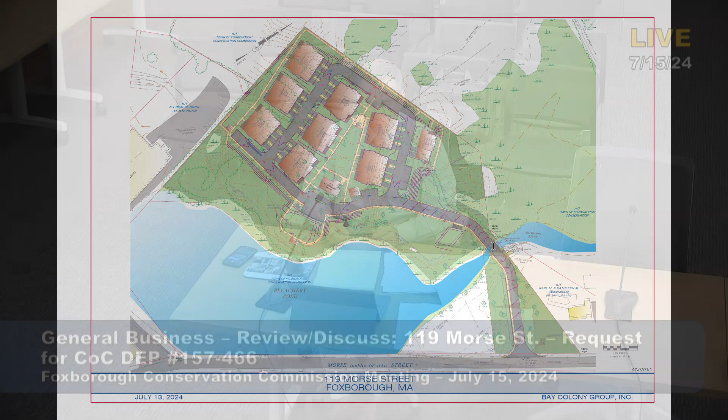As I stated, we went through the comprehensive permit process, and they call it a comprehensive permit because one board handles everything, the ZBA, but everybody gets input. So we took input from the Conservation Commission, the Planning Board, the Selectmen, the police, the fire department, and the DPW. Every board had input, and the ZBA listened closely and made sure we addressed the issues that were brought up.

What we're going to do is follow that existing path, but we have to widen that driveway. It's probably maybe 15 feet at its widest point. We have to widen it now because prior to our previous design, we didn't have to since it was commercial. But now that it's residential, the fire department wanted a minimum of 20 feet wide, and the Planning Board and ZBA wanted a sidewalk going out to Morse Street, because the school buses will not pull into private developments, so they wanted a sidewalk to walk out to Morse.

I'm going to talk about that in a moment. I wanted to point out that these widths we came up with were mandated by the different town boards for public safety purposes.

One of the things the DPW asked us to do is with the existing 6-inch water line. The water line ends right here, it doesn't cross over to Mansfield. Actually, the water at the bleachery, I think, is all Mansfield water, even though the line comes in from the back, it was never brought in that way. So what the DPW asked us to do is take this 6-inch water line and upgrade it to an 8-inch line, running from the 10, which is in that path.

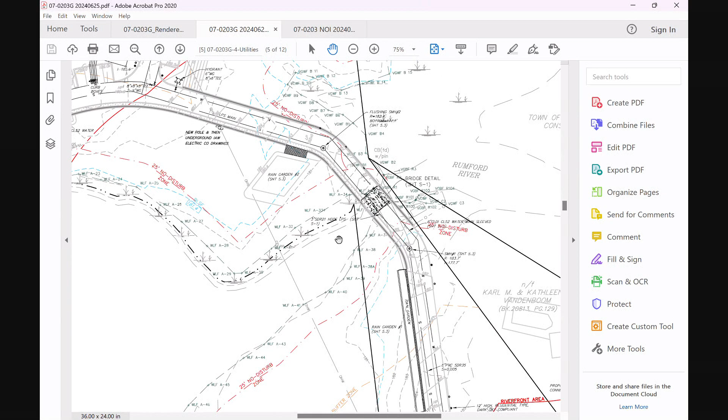So that's the drainage system there. Now down here, because of the grades on the site, this portion of the driveway, basically from Morse Street to about this point, we can't put it into the drain system because it's too low, too flat. If you recall, we come in flat, flat, flat, cross over the river flat, then it starts to go up, and we'll be filling the back area.

So what we're doing in that area is we've balanced the flows by capturing all the other runoff, so the rate of runoff is the same or less. But we still have to deal with water quality, because we have water coming off that driveway. We don't want it to go into the wetland or the river without being cleaned. So what we've decided to use in this area is rain gardens.

You've seen them before, bioretention swales, rain gardens. We're going to do two sets of rain gardens in this area. The first is over here, taking the runoff from the west side of the bridge. The bridge is right here, so we'll be pitching the driveway toward the bottom, toward the south, and then it will go through a pea stone swale into the rain garden.

And then it will clean itself. A lot of it's going to be infiltrated. We do not take any credit for infiltration, we're just taking credit for water quality, and then it will overflow into the grass, eventually into the river.

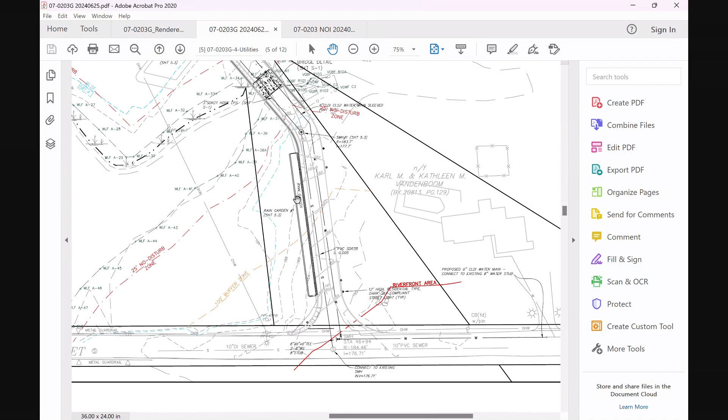Down in this area here we have the same issue. We have the pea-stone diaphragm next to the sidewalk in this particular case, and the rain garden runs along the whole edge there. Again, there's plantings in there, there's a soil mixture in there, and you'll have a runoff overflow that will eventually make its way into the river. So that's our drain system.

This project has been reviewed by the ZBA. They hired a consultant to go through the drainage and all of the other issues that were brought up.

I'd like you to go to sheet 6. While you're talking about drainage though, what about snow removal?

So usually I put that on there, and I don't have it, I have to add it. You'll see in John's comments that he wants me to make sure I put snow removal location areas on the plan, and I will. We'll keep those, they will not be in the rain gardens, they won't go into any of the drainage, we'll make sure of that. In this particular case, we'll make sure it's outside of the riverfront area.

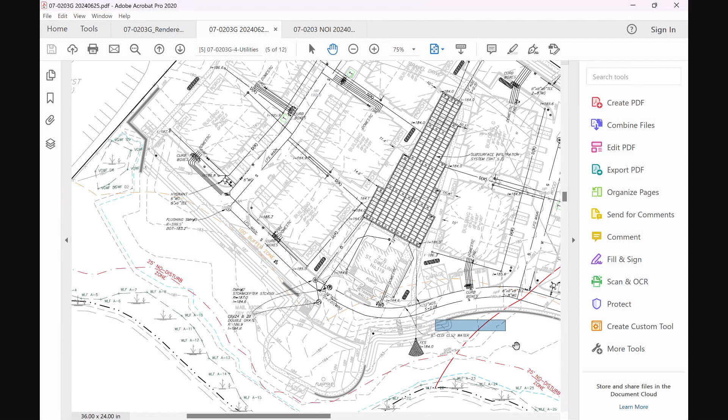We'll probably be putting it along the side of the road or the driveway down in these areas here. That's the easiest way, plowing down toward it. But we'll make sure it's outside the riverfront area. It will still be partially in the buffer zone of the stream, of the lake.

Because we have that big buffer between the driveway and the lake, you'll get a lot of cleaning just from it melting over the grass. Is this going to be a salt-free application? I doubt it. If you tell me to do that, I could put it in there. I'm just not sure it will ever happen, but we could, if you wanted to make that a condition.

This is not a zone 2. It's not a zone 2. It's not a zone A. It's not a surface water. It's not a groundwater protection area. I'm just pointing it out, and we all know what's going on next door, so it's not exactly pristine.

Are you saying it's called Bleachery Pond for a reason? It used to be called something else. What do you think, John?

Well, it's definitely an item we can have for conversation regarding any sort of potential conditions that we would put on this. So it's definitely an item we can discuss.

One thing I had, Bill, was I just double-checked the SWPPP plan and I didn't see the sediment controls along that water line that you're going to upgrade. I would just add those to that. I don't know how much room you're going to need on either side to do that work, but that just shows the contractor that they have free reign over there, and I think we should try to keep them confined to an area if we can.

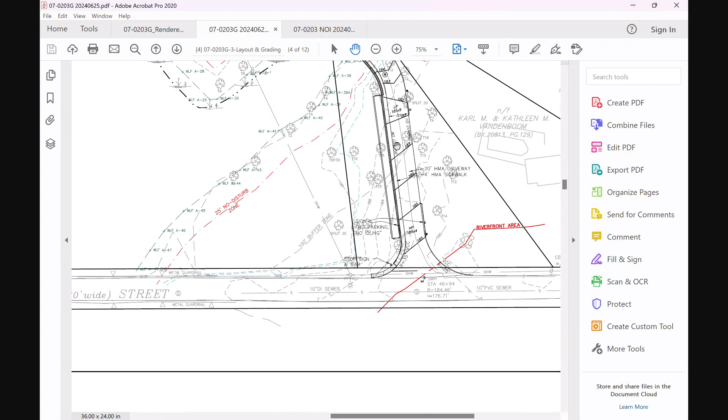So, see this note here? There's no curbing on there. So you're going to have a driveway, sidewalk with no curbing, so the runoff is just going that way. Up top, there will be curbing, but we created about a 20-foot wide cut, and that's where the pea stone is. So it will run off in that direction through the pea stone into it.

So the sidewalk and the street are the same level? Pretty much, yeah. It's kind of like next time you go down Payson Road, past the Ernie George Field toward North Street, you'll see the sidewalk and roadway are pretty much the same level. It's not the best — I did not design that piece.

They changed it. Here, it's a little different because you're not going to be flying through here. You're not going to be going over the bridge quickly, and you're not going to be coming in quickly. So normally you want curbing or a grass strip to protect the pedestrian. But in this particular case, excuse me, there's always conflicting things.

So we have the issue of wanting to minimize the amount of pavement because it's a riverfront, but we also have the safety issue. My opinion, it was okay in this area because when you're coming in off of a curve like Morse, you're going slow, and when you come over that bridge, you're going to go slow too, so I think you'll be okay. On the other end, I kept the curbing.

So maybe what we can do is go to sheet 6, please. I'm going to put that up on the board, up on the screen.

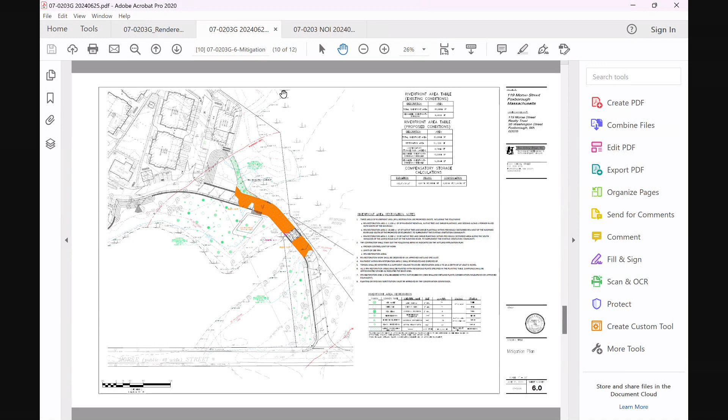So this is a mitigation plan that we've put together. Actually, Pear put it together for the project. Lauren is at another hearing tonight, so she cannot be here, but this is our mitigation plan. We also, in Appendix D in the actual report, if you had a chance to peruse it, have a fairly extensive discussion for the mitigation plan. It also has a wildlife impact report in there, again done by Pear.

So why do we need a mitigation plan? A couple of reasons. The first is we're filling within bordering land subject to flooding. As you can imagine, this is a flood zone. So the elevation of the flood in this area is, I think, 180.4.

And this orange that I'm showing you - it's terrible - the orange shading is the area that's bordering land subject to flooding, and that we're filling. It's 181.4, I'm sorry. So that's where we have to do compensatory storage for that area. And we're filling about 4,900 square feet - that's the orange - and it's about 990 cubic feet of alteration in that area.

So the way we're going to mitigate that is we're going to also use this rain garden area as compensatory storage. What that means is we're going to be digging out some of that grass, which we were going to anyway, to create it. By creating it a little bit deeper, only scooping it out less than a foot through that area - but it's such a big area, about 2,000 square feet - we're going to pick up 1,400 cubic feet. So we're going from 990 cubic feet of filling to 1,400 cubic feet of compensatory storage.

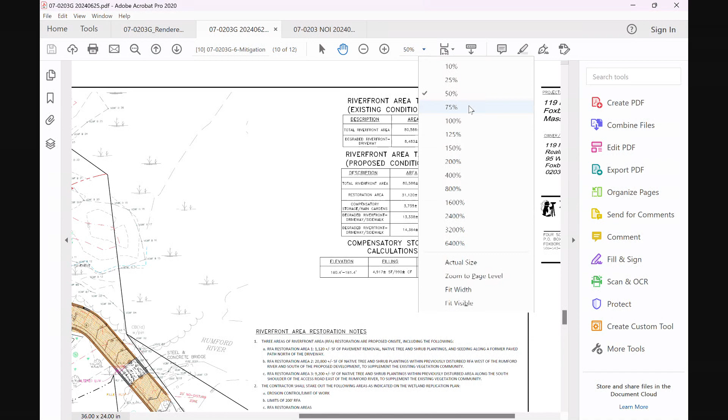So if you look at that sheet I gave you, what we try to do is go up in the corner here, as much for our own purposes as yours, and show you what we're looking at. So we have 80,000 plus square feet of riverfront area on the property.

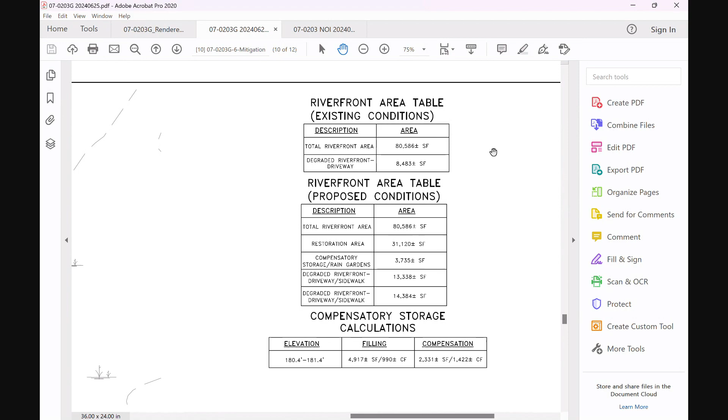Approximately 8,500 square feet of that is degraded. What does degraded mean? It means it's not green, so it's either dirt or pavement. That's the driveway mostly, and there's some gravel over there on the west side.

So typically in a riverfront area, we're limited to 10%, which would be 8,000 square feet of the riverfront area, or no more than the degraded area. So that would be 8,400. We're actually altering 14.

Oh, why is that on there twice? Let me go to my notes. I know why. So we're altering a total of 14,384, and about 13,338 involves the construction of the access driveway, sidewalk, and walls. And we're building walls.

I should have pointed that out, I will in a moment. When we come in over that bridge, we're building walls. And why are we doing that? Because if we didn't, we would have to grade out, and we'd be altering more riverfront. So by building the walls, we're minimizing the amount of riverfront we're altering in that area.

So as I stated, we went back as far as 1936, and this driveway and building was here. So we believe that it does fall under the definition of a limited project, which says that we can construct and maintain a new roadway or driveway of minimum legal and practical width acceptable to the planning board, which in this case was the ZBA, where reasonable alternative means of access to an upland area of the same owner is unavailable.

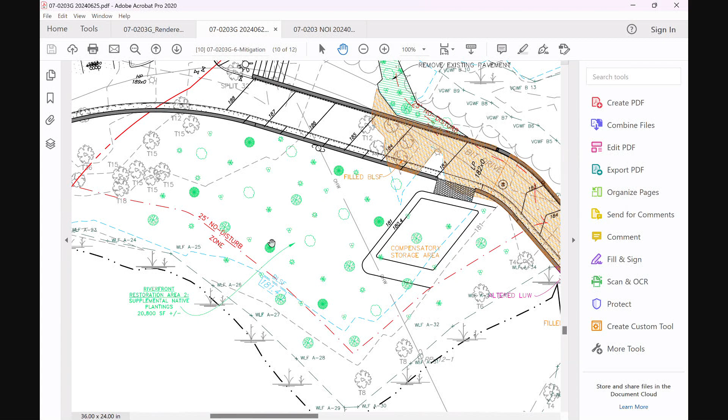If you remember, you drove in, this is all grass. So Lauren thought that it would be good. What we want to do is take this riverfront area two and do some supplemental native plantings in there to augment what is currently there. And the reason for that is to stop any invasives from moving into the site.

And if I remember correctly, even along that riverfront, it's nice - there's not a lot of invasives through that area there. So you can see this is a large area, about 21,000 square feet. And then the third riverfront restoration area that was planned is down here as you come in from Morse Street, again on the left.

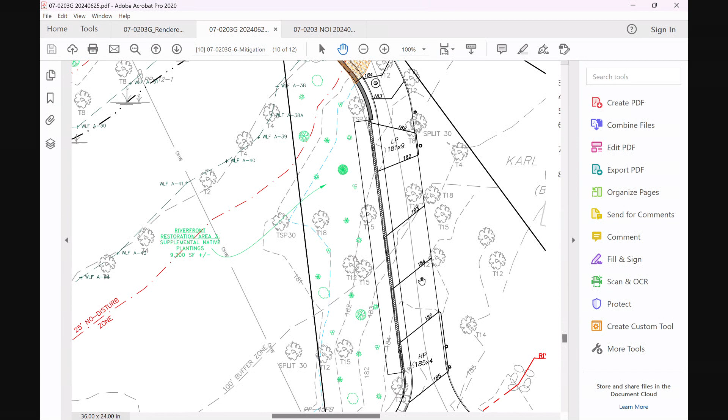If you look at if you pull up there on that driveway, go into that driveway now, our new driveway is no further left than that. So we held that left line closest to the pond, and we went this way. I think you can see that on this. This is the existing driveway right here, and this is our new driveway.

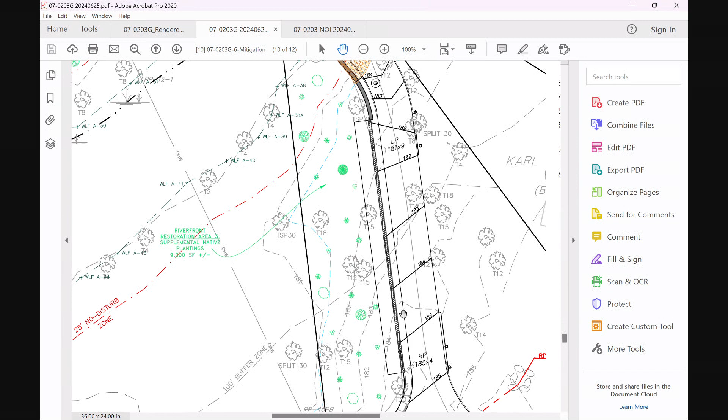So we've held the left, moved to the right, and the only thing that went a little bit left was our rain gardens, which are allowed to be constructed in riverfront area. They don't count as alteration.

Monitoring and maintenance will be solely at the developer, and then the condo association will have to do it. Lauren prepared a maintenance plan, and we also have a stormwater maintenance plan.

My Joe Biden moment.

So it's a maintenance plan, an operation and maintenance plan. Some of the other things that the commission must consider as a performance standard, and again, I've outlined this in my letter, is protection of other resource areas.

So what other resource areas are we dealing with in here? We are doing filling within the bordering land subject to flooding, which I just talked about. And then there's also some work up here in isolated land subject to flooding. That's not on this sheet, that's on sheet 3, which I'll put up on here in a moment - up on the left, the northwest corner.

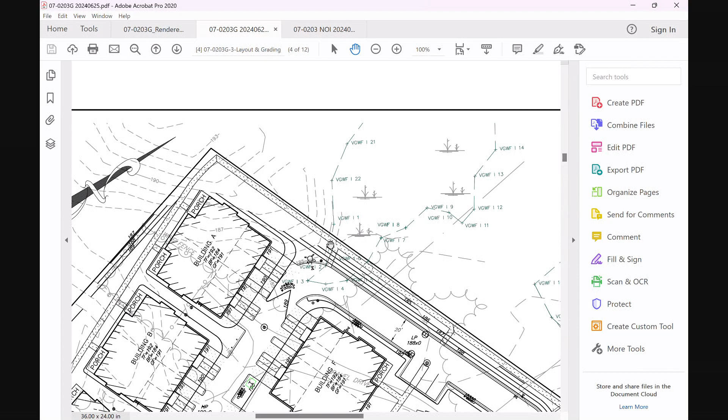This area right here is an isolated land subject to flooding. There's a little piece of it that comes into our area right here, and we're filling that, we're altering that. So you can alter isolated land subject to flooding, but there are some requirements that you have to do.

And what we're doing here, you have to look at flood damage due to filling, which causes lateral displacement of water. In this particular case, there's nothing back there. This is just a large isolated wetland, so there's no damage - there'd be no damage to any human activities anyways.

Adverse effect on public and private water supply or groundwater supply: said area is underlain by pervious material. This is not a public or private water supply area, as I mentioned. It's not a zone 2, it's not a surface water supply protection area.

An adverse effect on the capacity to prevent pollution of the groundwater - again, this is not a groundwater protection area. And then there's impairment of its capacity to provide wildlife habitat where it's a vernal pool habitat. In this particular area, this is not a vernal pool.

One of the things I didn't point out, but I will now, is we lie within an area that falls under the Natural Heritage Program. Back in 2008, it fell under it too, and we had filed with them at that point. They gave us a no-take notice, which means that whatever we were doing was okay. So we have refiled with them as a part of this notice of intent, and we have not heard from them, but I hope and expect to get a no-take, because this plan is significantly less intensive than the commercial design we had before.

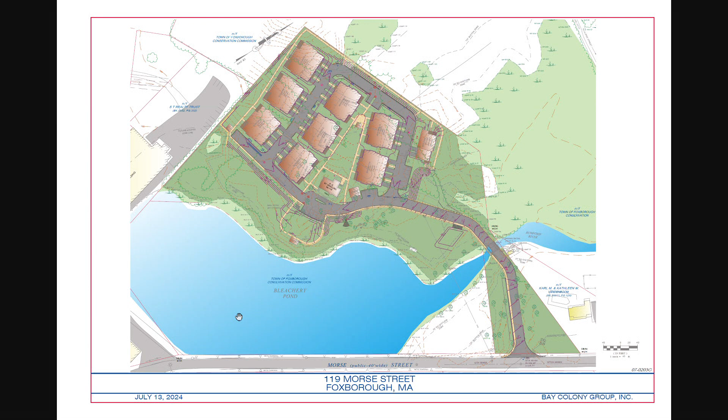Aye. Opposed? Thank you. Bill, is that triangle ours, or is that owner unknown? That's yours - this is all town land right here. Is the whole pond Concom? Yes. You own the whole pond and that triangle, and then across the street too, that whole pond. Would've known - you guys got the bucks.

A fence, yeah. Okay, it being 7:10, we have a continue - the 119 Morse Street, the old one. Actually, I was going to interrupt and do that first, but that's all right. We got 119 Morse Street, request for a certificate of compliance that they didn't do anything.

157466. So what's the technical term on that? We're voting it as an invalid order of conditions. Somebody want to make a motion for invalid order of conditions on 119 Morse Street, DEP 157-466? Do I hear a second? Second. Discussion? All in favor? Aye. Opposed? None. All right.